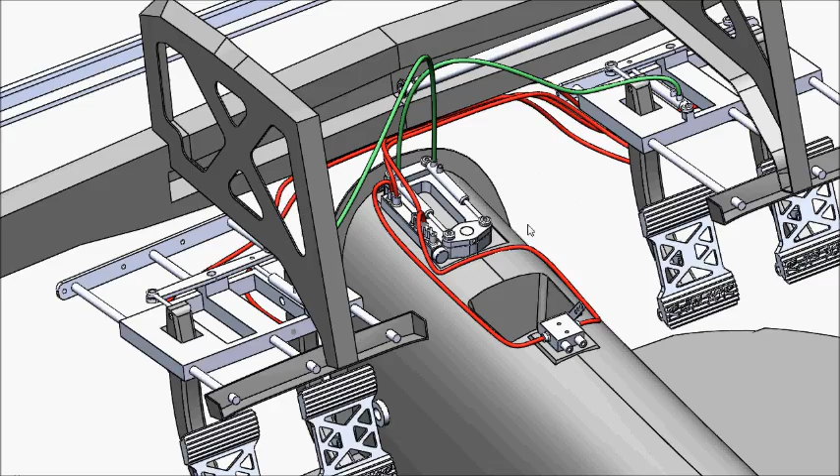So with the Raptor, what I've actually designed in here is the rudder pedals are adjustable, and as you can see here, there's this brace that comes from the firewall here and comes down to and meets with under the dash, and I've obviously got the dash hidden right now, but you can see here there's 3 rods that this fixture mounts on here, and it slides back and forwards, and obviously that's how you adjust the position of the rudder pedals.

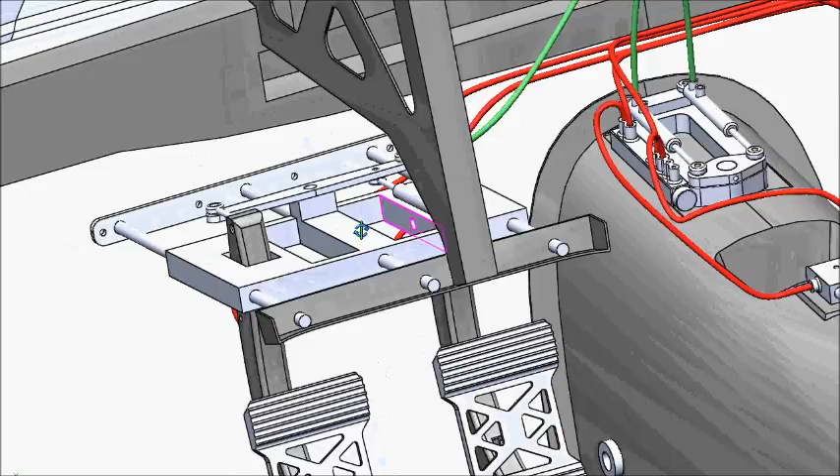And there's a 10-inch movement there, so with a combination of being able to move the seats back and forth and moving the rudder pedals back and forth, whether you're 5 foot tall or you're 6 foot or 6'7" or 7 foot tall, you're going to be able to make it comfortable for you, not feel like you're trying to reach or you're squashed or whatever. So it's really going to be a good setup.

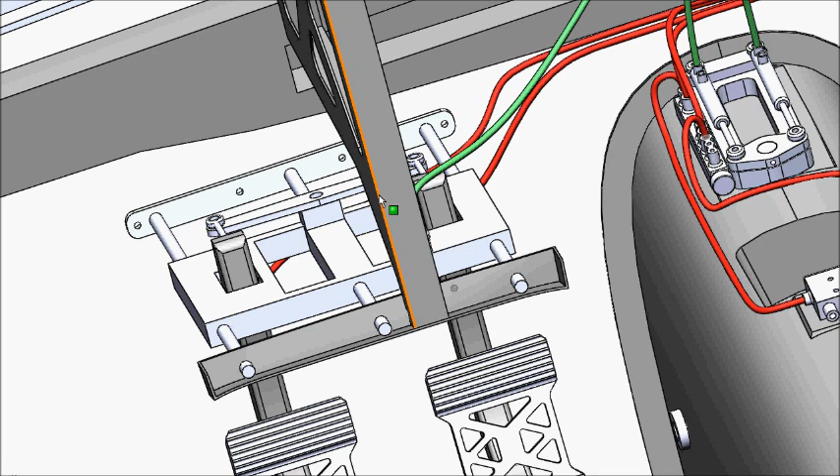And of course, the biggest problem when you design adjustable rudder pedals is how do you hook them up, because they're going to have to move, and you don't want to have a mechanical linkage because that creates a problem, because the geometry changes, and also with cables, the same type of thing. The cables will change, and so you end up having not a very good system. So I decided that if the brakes are hydraulic, then why shouldn't the steering be hydraulic as well?

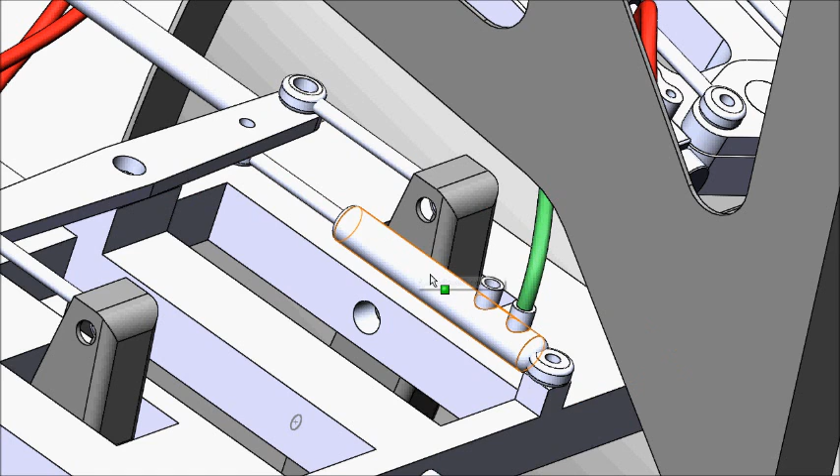So if you actually look here, I'll explain how it works. So I'm just on one of the pedals, on the left side here. So when you push on the rudder pedals here, it moves this arm back and forwards, and that moves this piston in and out. Okay, and it's just a very simple system here. So when that piston moves in, let's just say you push on the right rudder pedal there, that pulls this forward here, this arm rotates clockwise, it pushes this piston in, and then the hydraulic fluid in that line

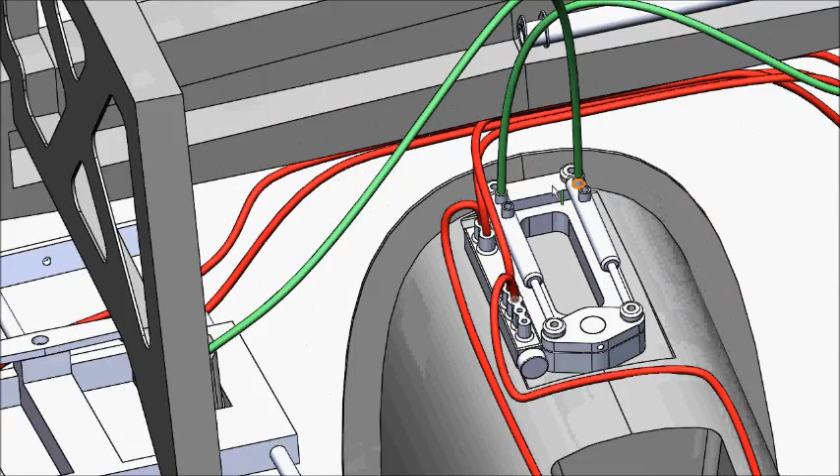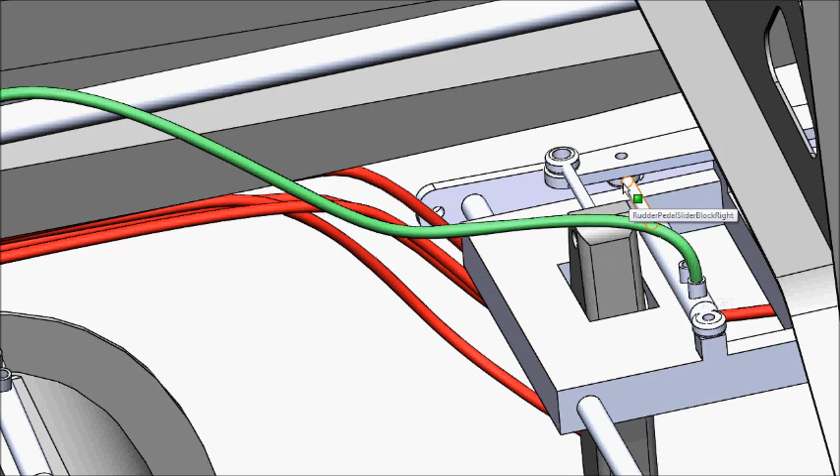comes over here and pushes this corresponding piston out, and that in turn rotates this mechanism here, and you'll see in a minute that's connected underneath to the nose wheel steering, and at the same time pushing that piston out moves this other one in, which forces all the fluid out of that, and it goes down this line over to the left pedals and will actually push this one out, which has the effect of basically moving the rudder pedals in conjunction with the other side.

So they both work independently, but the beauty of the system is that you can slide your rudder pedals back and forward, adjust them independently of each other, and not have to worry about any geometry changing that affects how they work. It's purely a hydraulic system, so it's really neat and tidy.

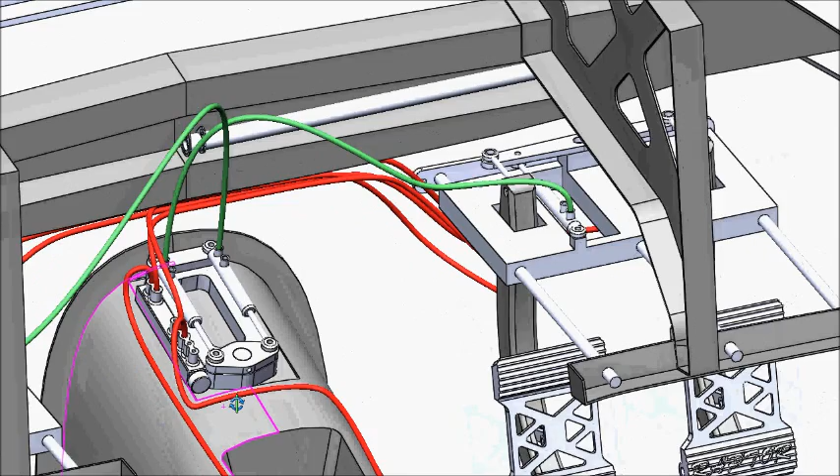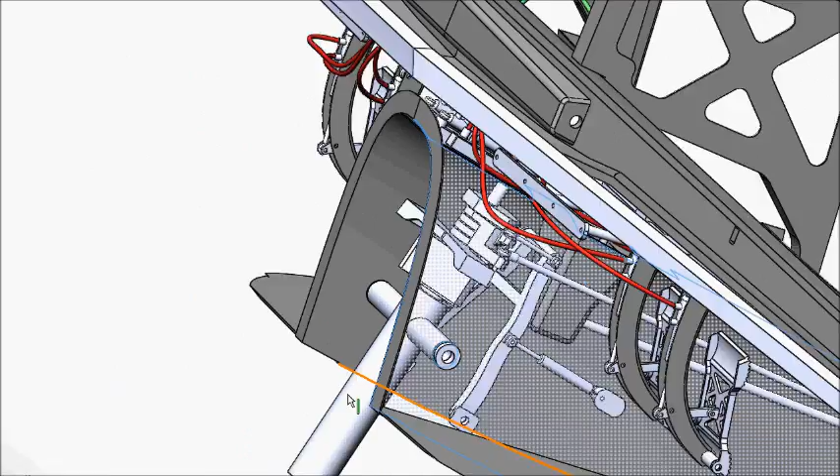And underneath here, I'll actually just change the visibility on this, or the transparency. So as you can see, underneath there is the nose gear. So this particular rod here will pivot, and that's basically attached down there to the nose wheel. It goes through this main rod, which doesn't, but then it's fully attached to this one here, so that whole thing will pivot. And how that all works, when the landing gear actually goes down, it meets up with this sort of thing here.

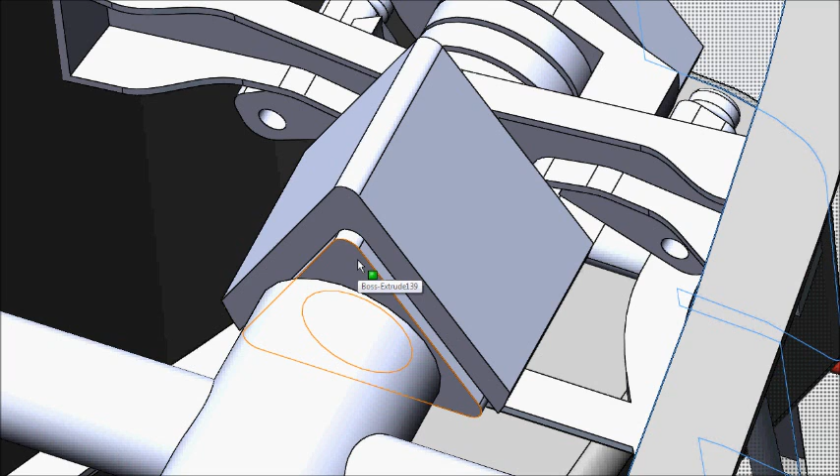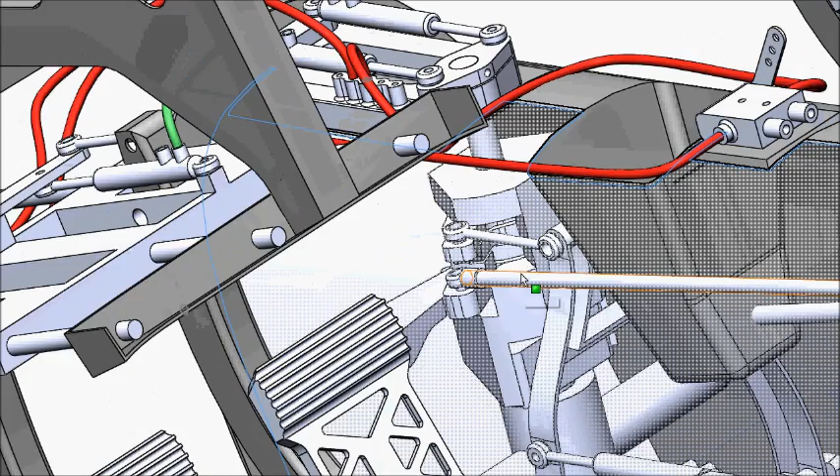So I can't really retract the gear right now, but as you can see, this gear will rotate around this point here, and these 2 little V things will disengage when you put the gear up, and when the gear comes down they re-engage, and that attaches the steering system there. And there's a lot going on in here that I'll talk about in a minute, but as you can see, that's how the rudder system works right now, and that's for the nose wheel steering. And I'll show you again in a minute, but the rudder is actually hooked up to that as well. Well, actually, let me just talk about it right now.

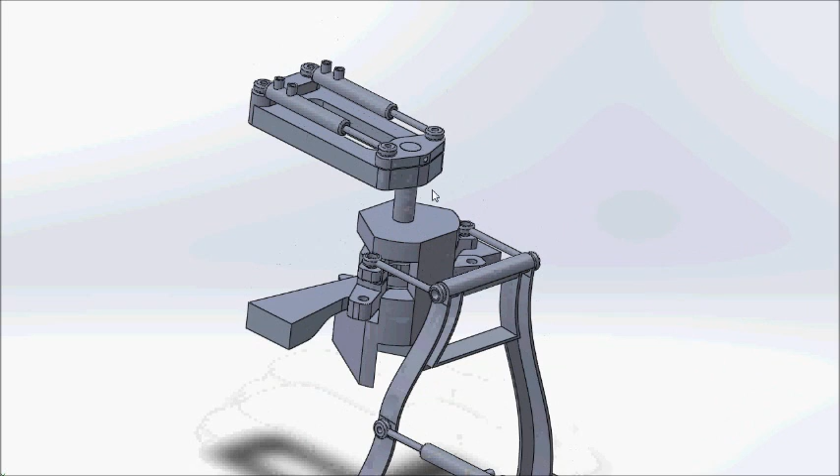So here's this crazy looking contraption that looks something like out of Star Wars, but let me explain how it all works. So let's just take the example of you're pushing on your left rudder and wanting to turn left. Actually no, let's just do right rudder and wanting to turn right. Okay, so when you push on the right rudder, you need the nose wheel to turn to the right.

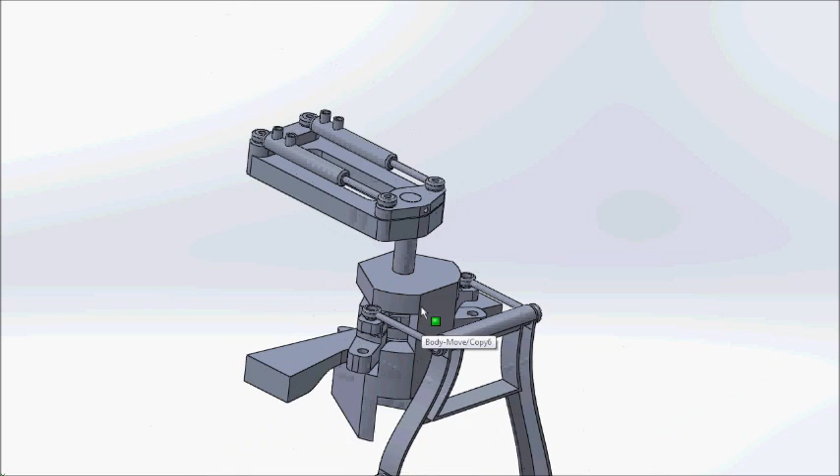Okay, so what ends up happening here is when you push on the right rudder, this piston here gets extended, which rotates this in a clockwise motion, which again is attached to this rod here, and that rotates in a clockwise motion. And then this next piece or fixture or whatever you want to call it, that rotates as well in a clockwise motion,

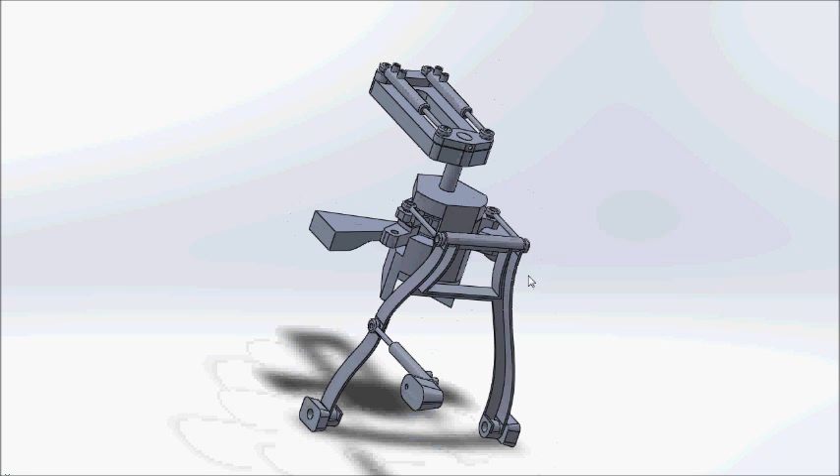and that is attached to the nose gear via the V here, the mating V between it and the nose gear main shaft. And so that whole fixture turns to the right up to 40 degrees, and that's how you turn the aircraft when you're on the ground.

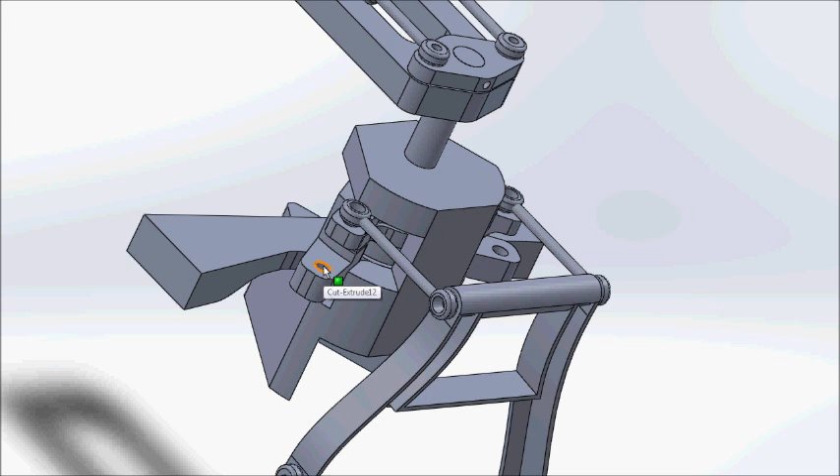Okay, so now how does it work with the rudders? The way that it's being designed here is that this connector point here on the left side actually hooks up to the right rudder, so they're sort of crossed as they go back through, down through the keel and up back over the main tank in the back there, and then of course they switch over onto the opposite wing.

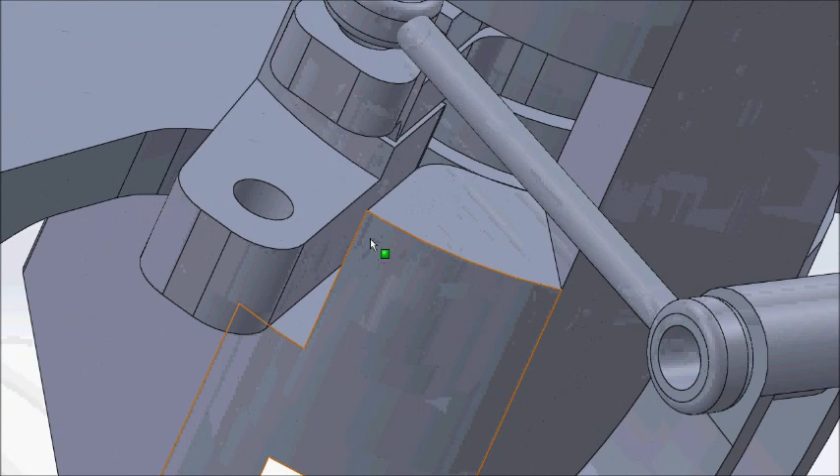So what ends up happening is here, when you push on the right rudder, this rotates clockwise, that rotates clockwise, and as you can see down here, this point here is already pushed hard up against this thing here, and so when you push right, this thing will rotate right.

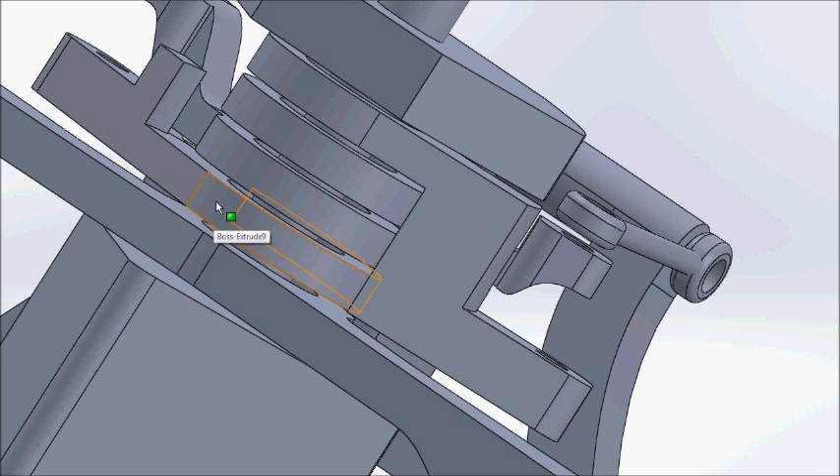And as you can see here, there's 4 different things here. The top one here is for the right rudder, even though it's on the left side of the aircraft, and then this bottom one here is for the left rudder, even though it's on the right side of the aircraft, and these other 2 I'll explain in a minute, but those are for the drag brake actuator. And all 4 of these will be riding on a regular sealed bearing there, so they could rotate freely around that center shaft there.

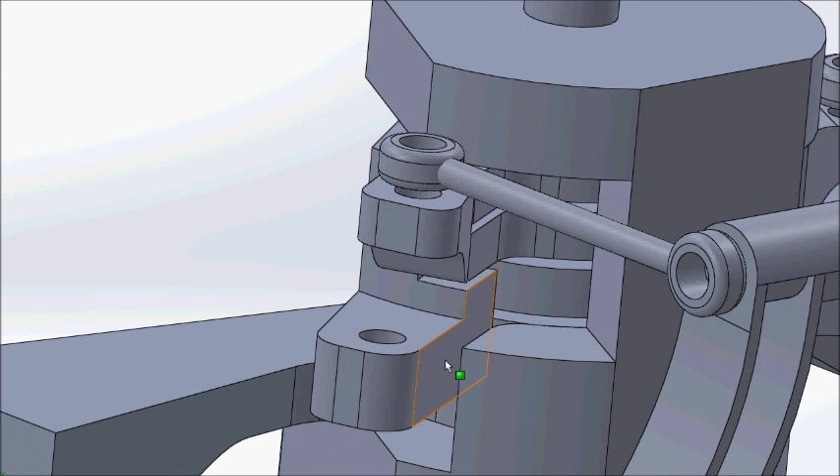So you've pushed on the right rudder, you're rotating this thing clockwise, and that in turn is pushing here, this interface between these 2 pieces, and it will move this thing through an arc of 40 degrees, and the actual movement here is a 2-inch movement from here to where it ends up over here, and the rudder connector rod is connected to that.

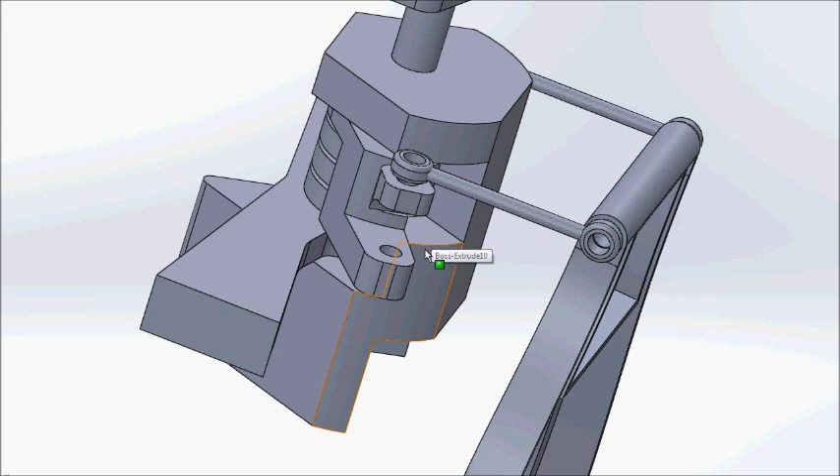So by pushing on that, you're pulling on the rudder connector rod, and then that goes back all the way out, down through the wing spar and right to where it turns that right rudder and deflects it to 40 degrees. So actually the rudders deflect 40 degrees, and so does the steering. So it should actually have really good rudder authority, being able to push it 40 degrees. So that's kind of how that works. And when of course you relax your pedals back to center again, that will just come back.

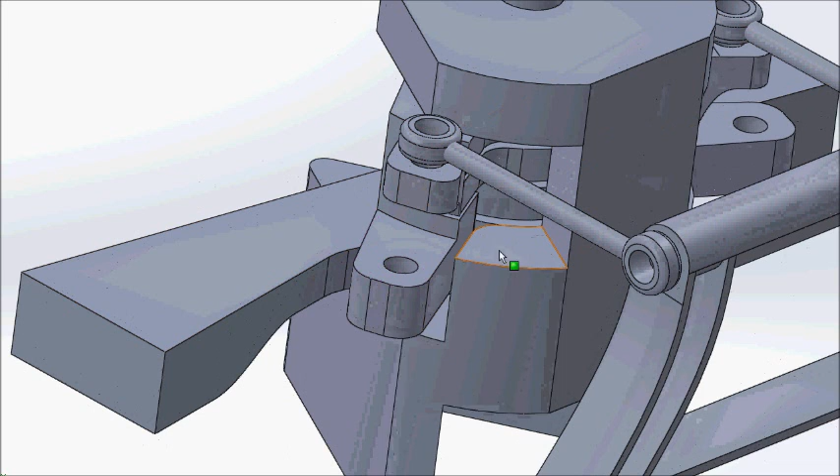Now that whole time when you were pushing on the right rudder, nothing was happening on this other arm over here, because that can't go back any further than that, because that's the stop point for the rudders. In fact, there'll be springs holding these, so they will always return back to this center position here, or the non-deflected position if you're not using them. And that whole time this fixture here had rotated away from this thing here, so it didn't have any interaction on it, so that rudder didn't get actuated.

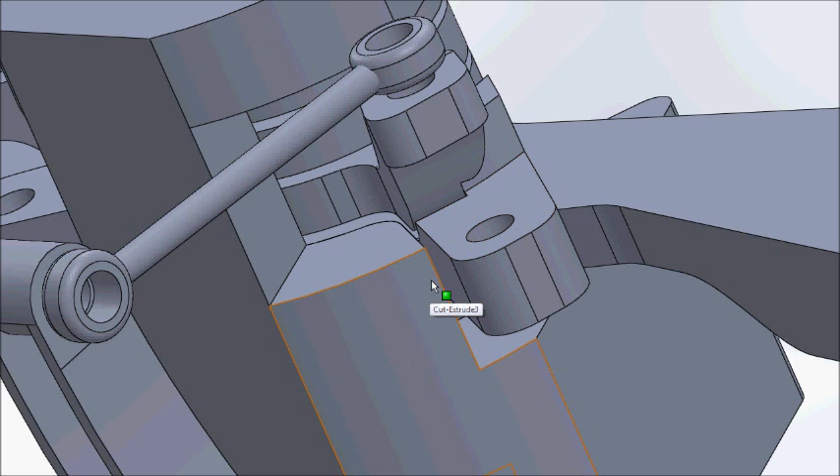And of course if you push on the left rudder, this thing rotates anti-clockwise, and then that thing will get pushed that way, which will pull on the left rudder arm actuator, which will engage the left rudder. So they work kind of independently, but they're sort of hooked up to the steering mechanism.

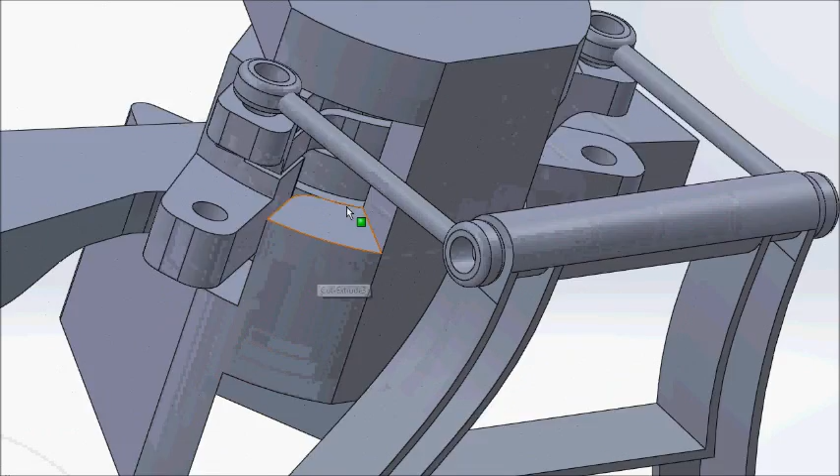And the reason why I've got this other thing here, this is for the speed brake, because I wanted to be able to also have a speed brake for the system that was operated by a push button on your side stick.

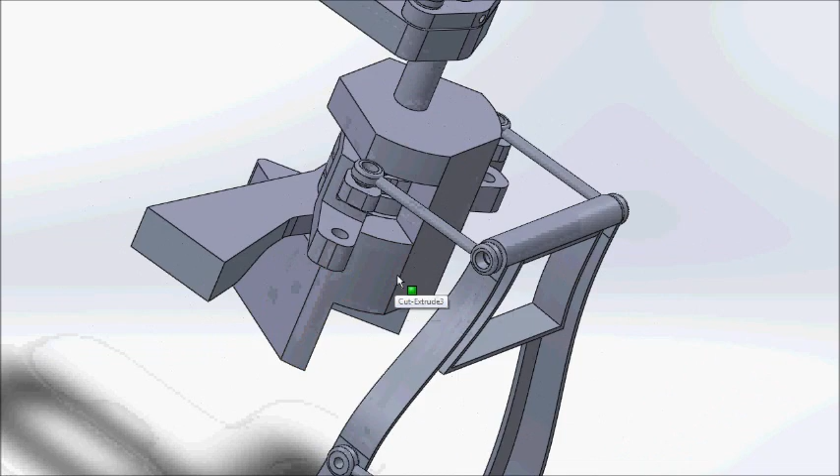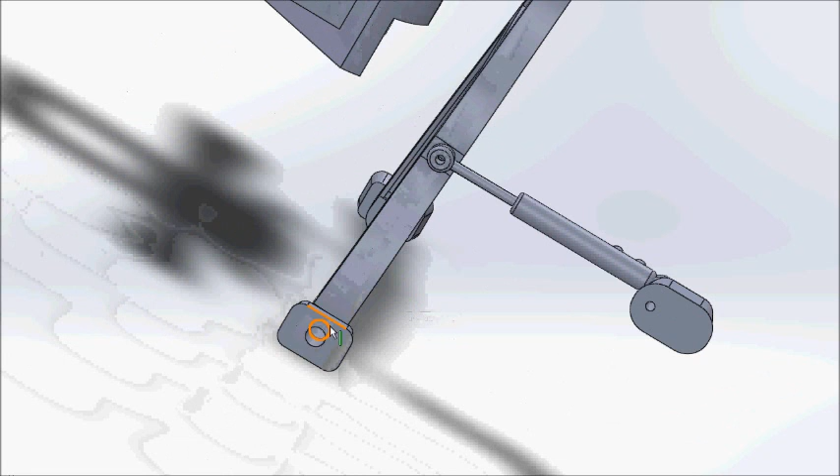So there'll be a single momentary button on the side stick, you have to hold it in to keep it actuated, and that will operate an electric motor which will hydraulically push this cylinder out here. This particular arm down here pivots around this point, and it's fixed in under the keel there, so when that arm goes out, it pushes this whole arm fixture here, and it rotates around that bottom point. This point here will move to about here, and in doing that it will push this arm here and the corresponding one on the other side.

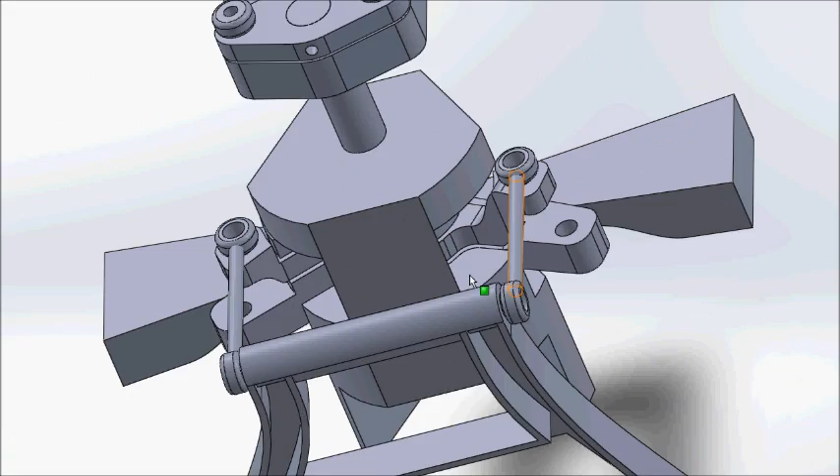They'll both get pushed forward, and as you can see, if you look down through here, that's part of this arm here, and when it pushes forward, it can't do anything but push the rudder arm forward as well. And again, it's independent of where the steering position is. If the steering's in the center, this will just push forward, and both rudder arms will come forward because they're pushed up against there.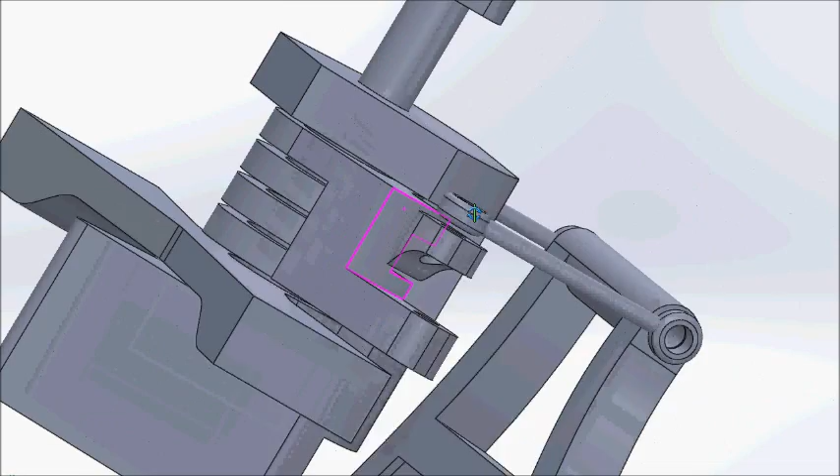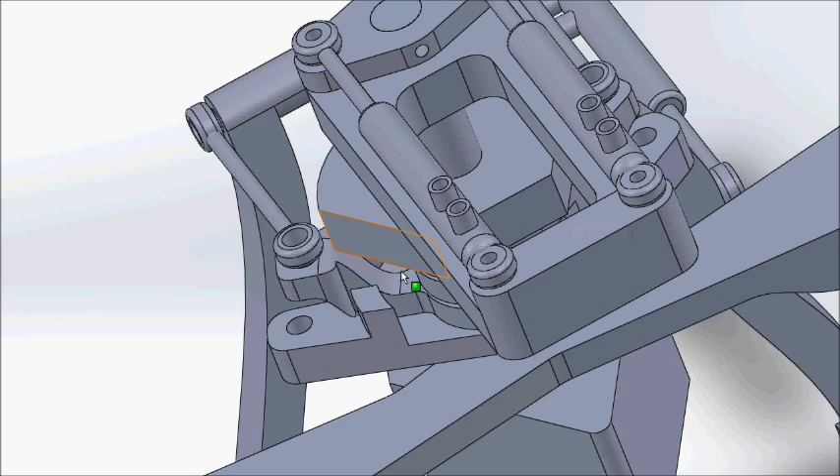You can see how that one interacts with the other, and it's the same on the other side. This one's more obvious because you've got a pillar there that's resting against that, so one just pushes the other. So you'll be able to push that button and both rudders will be actuated, and when you let go, because it's spring loaded, the rudders will come back in. So that's kind of a nice system.

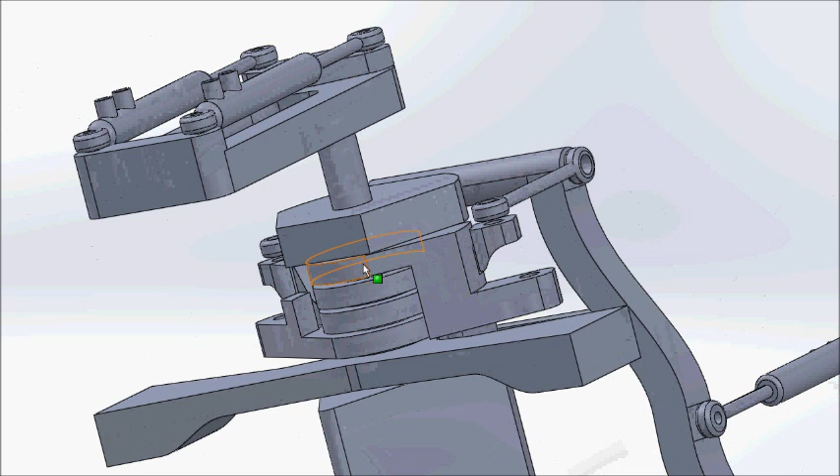It looks a little bit complicated, but if you think about it, it's actually very simple, with very little that can go wrong and very little that can wear out. So that explains how that whole system works. And like I said, there will be 4 different sealed bearings in there, so they can rotate independently. And then this arm here is a brace that braces from one side of the inside of the keel to the other.

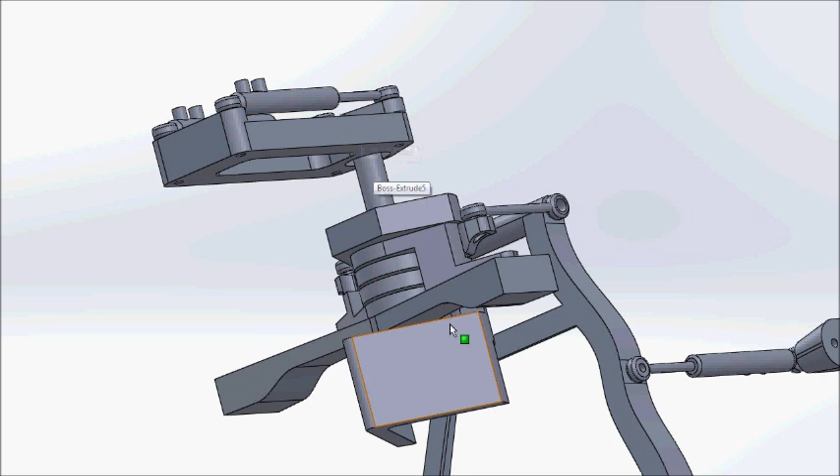So you've got a point up here where this bolts to the top of the keel to hold the shaft, so it's not going to move around. And then this brace here is on the side of the keel to hold the whole mechanism so it won't move around. And then this will all be CNC machined out of billet aluminum, so it should be fairly lightweight but still strong enough to do what we want it to do.

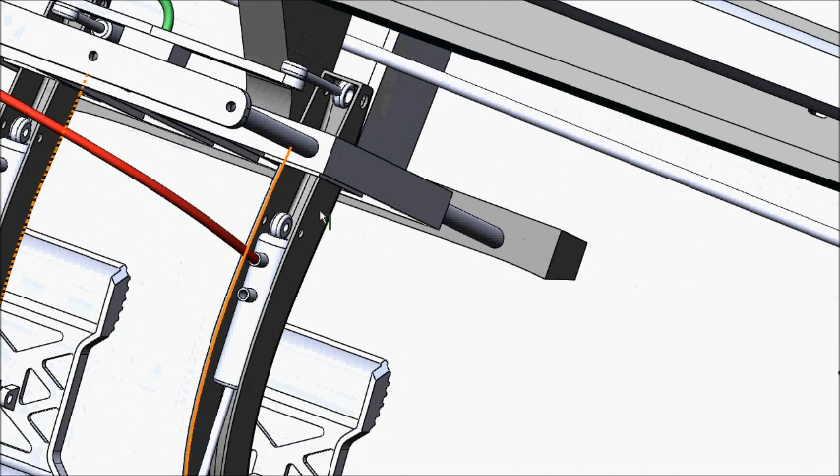Then the braking system: if I go into that, you'll see behind each of these rudder pedal arms you have the brake master cylinder, and the ones on the left side are connected over to the ones on the right side, and then they connect back. We're going to be using the Beringer system, and once they connect back from the passenger side, they connect into their anti-lock braking system, which provides a regulated amount of pressure so you don't lock the brakes up.

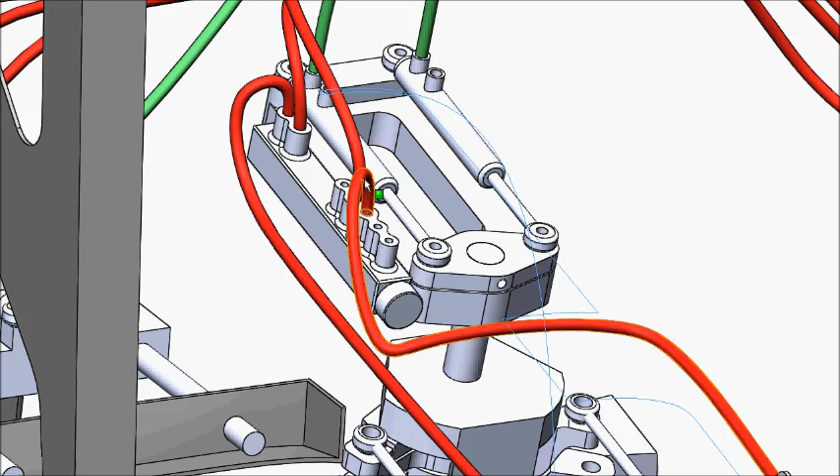And then the system from there comes out here and goes into this little control, and that's for your park brake. There'll be a lever here that hooks up to your park brake system for when you want to lock the brakes. And then out of these 2 things here will go to your left main brake and your right main brake. So that's the braking system all sorted out, nice and neat and tidy, and again anti-lock, which is kind of nice.

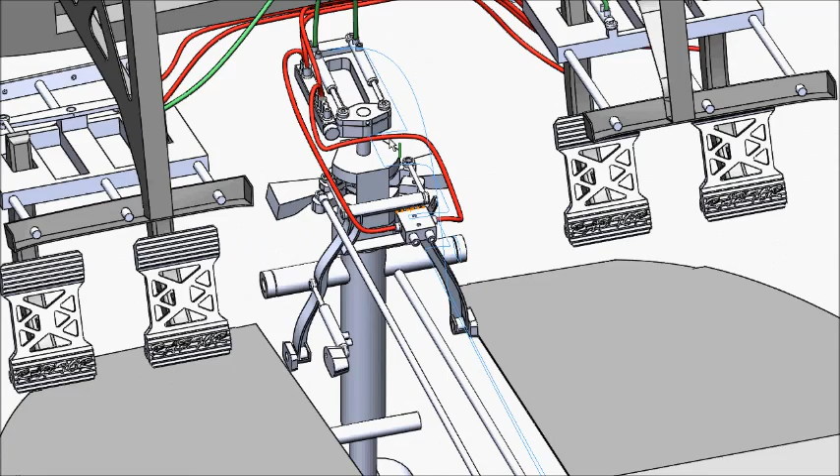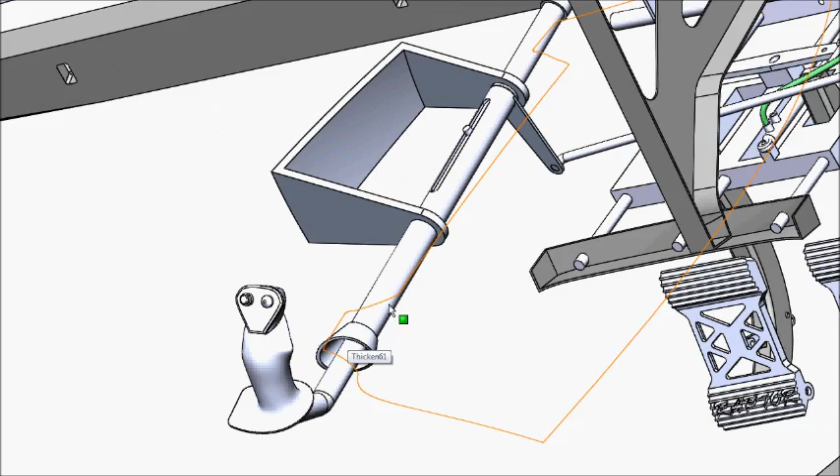Okay, so let me talk now about the flight controls, and I'll start with the aileron control. I've got the dash hidden here, but as you've seen in previous pictures, the control stick, and this is the one on the left side, comes out the bottom left hand corner of the dash. For working the ailerons, it's just going to be rotating it to the left and the right, and right now it's configured for an 80-degree total throw, so 40 degrees to the left and 40 degrees to the right.

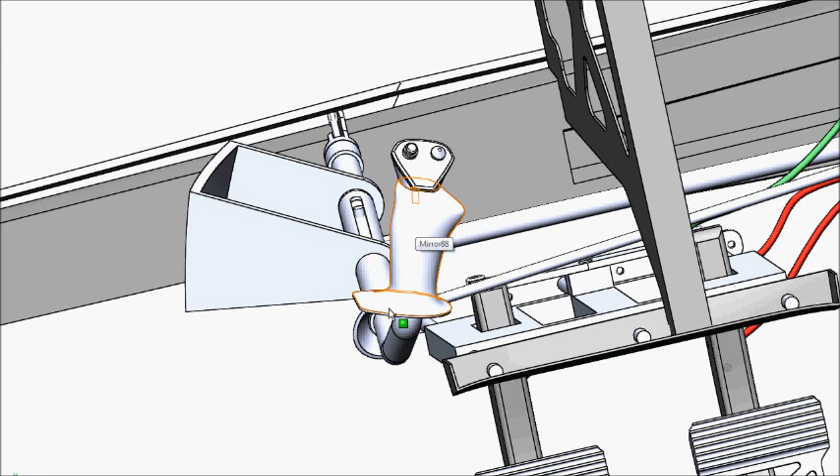And as you can see there, the center position is on an angle, so it's not straight up and down, because you'd be hitting the inside of the door trim if it was. So this will move from this position over to about here, and that will be full left aileron, and then it'll move down to close to horizontal for full right aileron.

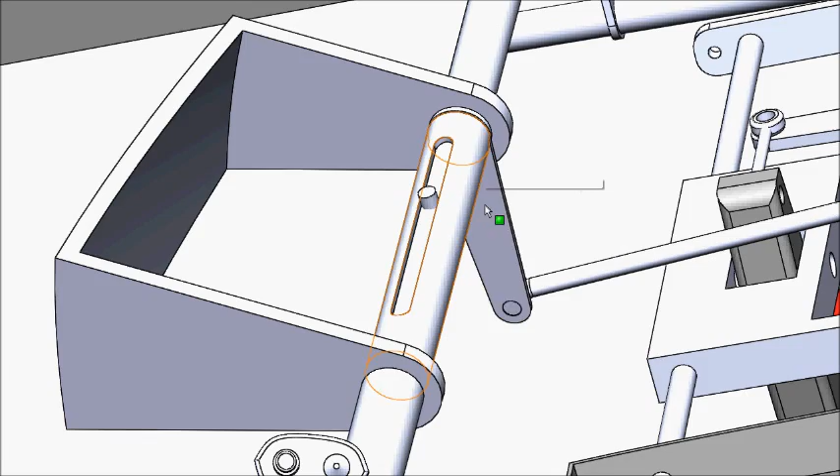And what that actually does behind the dash here is it moves this particular fixture here, which in turn is completely adjoined to this arm here, and that moves this rod, and then you have this larger rod here which goes down into this thing.

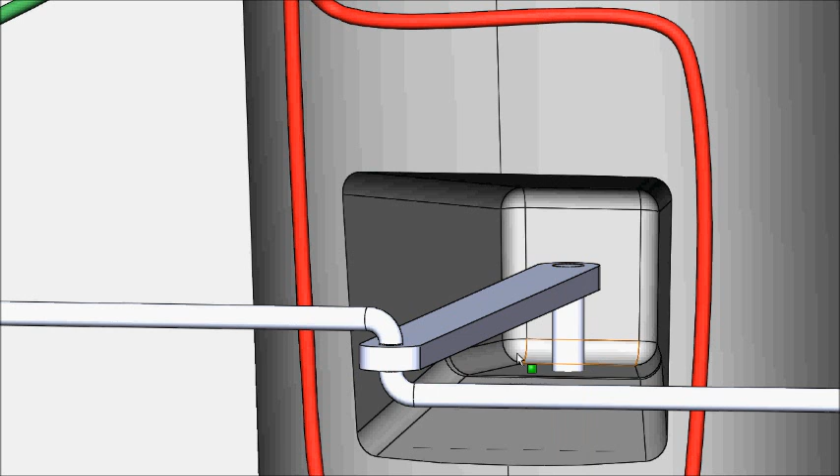And the reason why this is down in here like this is because there's going to be a bearing in here which is going to be sealed for the pressurization, and this is the cleanest way to ensure pressurization of the cabin without having to do a bellows system or cables or anything like that. So it's a nice, neat way of making sure that the cabin stays pressurized and still having all the geometry of the controls work correctly.

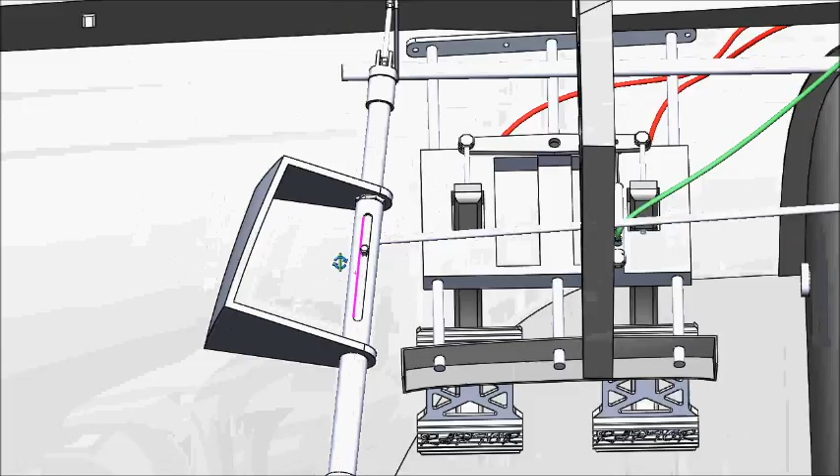So as you can see here, let's say if you move the control stick to the left here, that's going to rotate it this way, anti-clockwise, which will in turn move this arm closer to the center of the aircraft here, which will move this arm across here and then back down here.

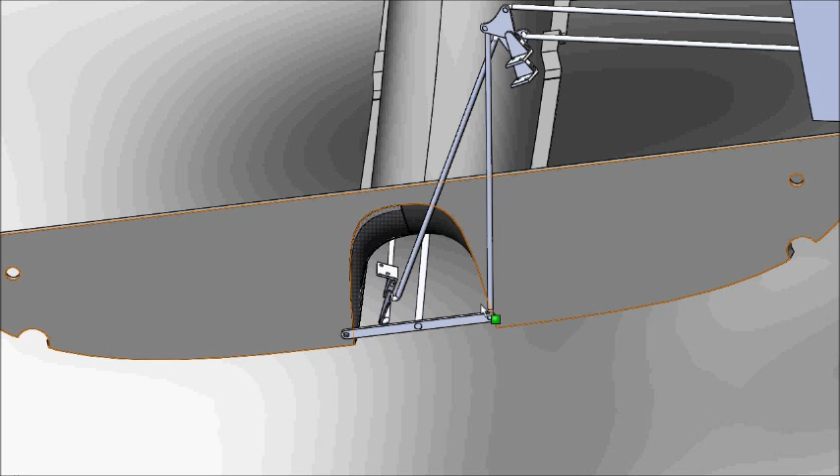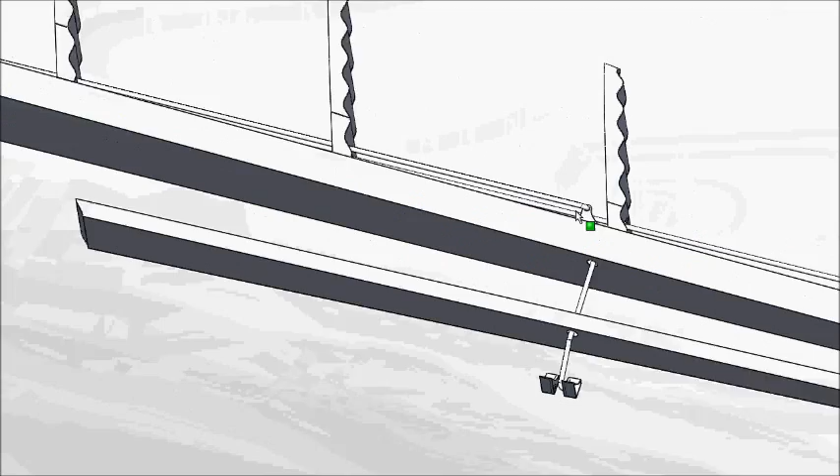That arm ends up being connected to here, and because it's moving across this way to the right, this thing here will rotate clockwise, pull this arm down, which ends up pulling this arm here back for the ailerons, and we go all the way out here, it's pulling this one back here. I'll rotate around so you can kind of see what's going on here.

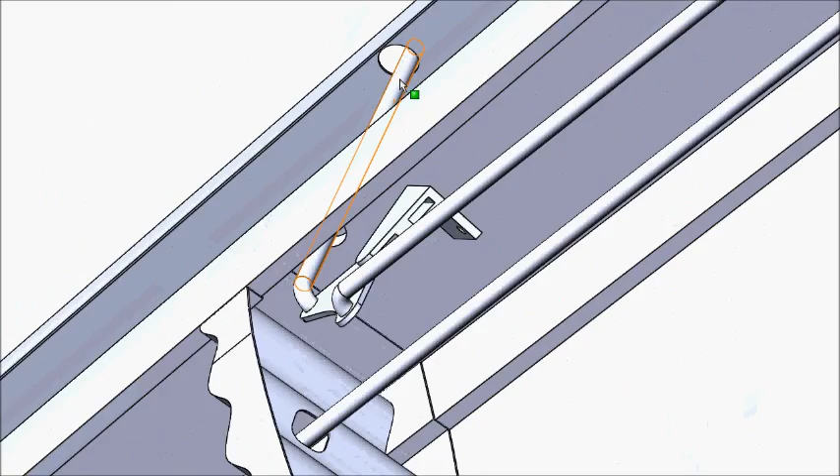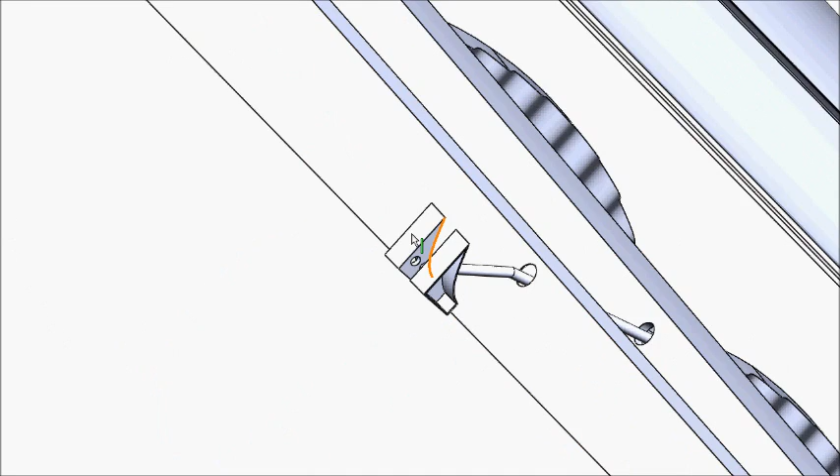So that pulls this back here, which in turn pulls this arm back here, which in this part here you obviously can't see, but that is inside the aileron, and that will pull on the aileron and it'll rotate around the hinge, which is here, and so it has the effect of putting the aileron down, and that's how you make your left-hand turn. Because that aileron will come down, the wing will go up here, and you'll make your left-hand turn. So that's kind of how that works there.

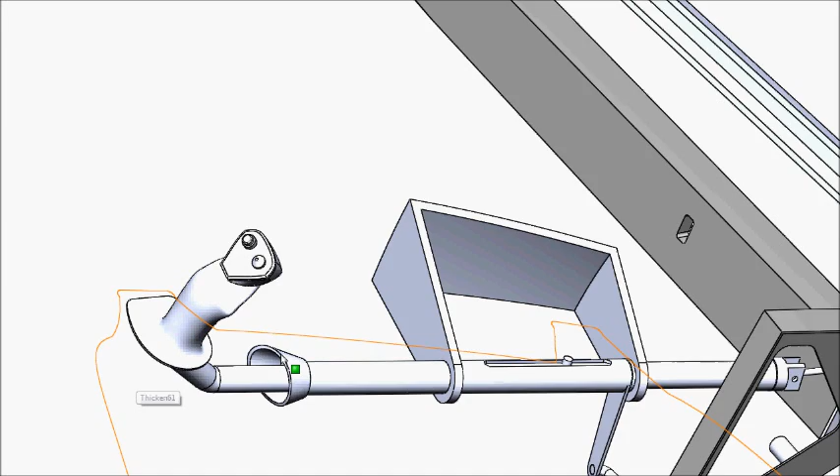And let me now explain how the elevator part works. So the elevator, obviously you're pulling on your stick, moving it in and out, and by default you have 15 degrees pitch down. In other words, the elevator can come up 15 degrees and it can go down 30 degrees, so you have more authority when you're putting it down to get your nose to come up, because you don't really need a lot of nose down authority on the elevator. So like I said, 15 degrees the elevator comes up, and 30 degrees it goes down.

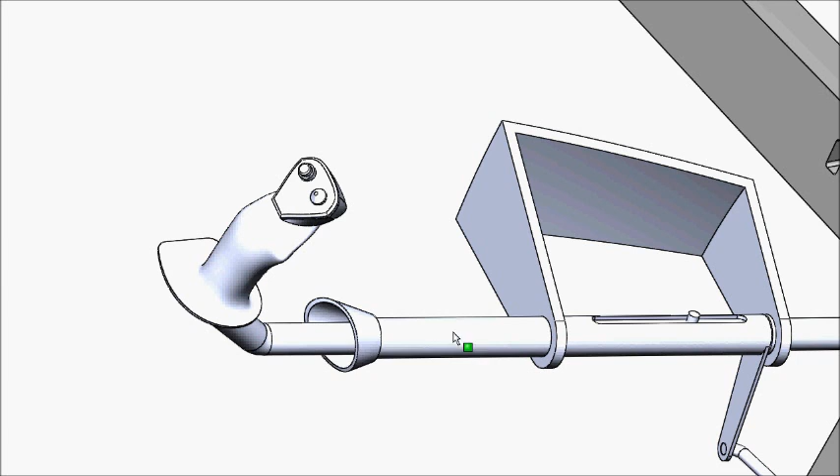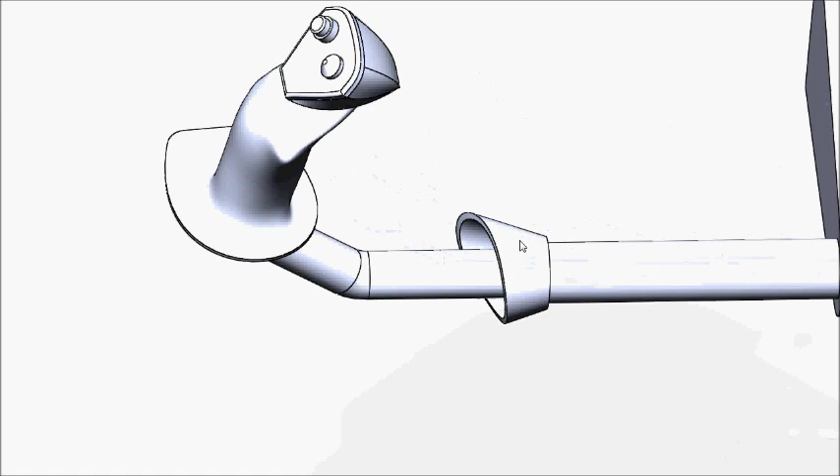So how that translates to the actual control stick here, this is the center position here, you'll be able to push it in about 1.7 inches, and it'll come out about 3.4 inches, so the total travel is about 5 inches. So it's a little bit less than probably what you're used to in some other aircraft, but in terms of being comfortable, unlike maybe a Cessna 182 where it can really come out a long way, you don't have to move it quite so far.

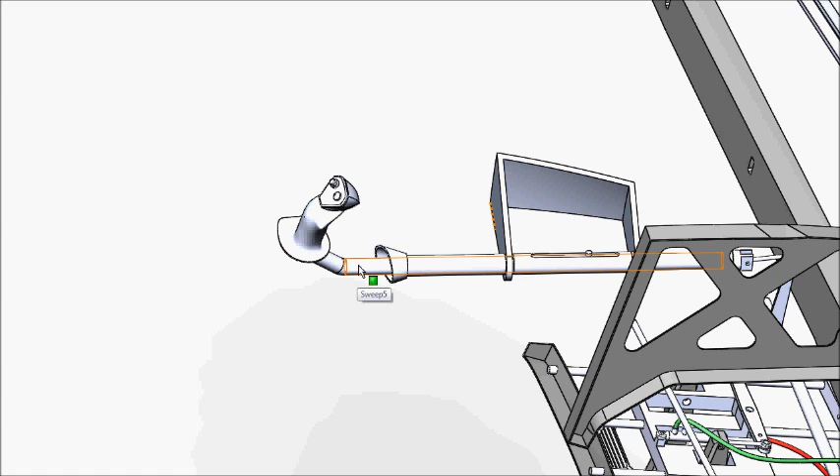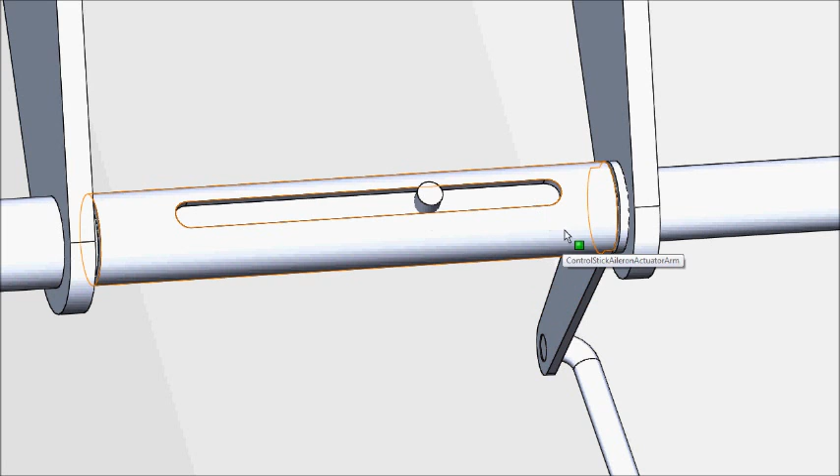So the controls should be light because of the horns that we have on the elevator to ease the control pressures. So it should be kind of nice, but still not feeling overly sensitive. So when you move the control stick out and back in again, this little pin here is basically locked into that center thing, so it can slide back and forwards and not interfere. But that pin there is really to make sure that the ailerons work, so it slides back and forwards, so when you rotate it left and right for your aileron control, this actually moves.

But this whole arm in here moves in here, and this is fully attached right to the stick all the way back to there. So when you pull back on that, it pulls back on this arm, and let me see if I can get a good angle on it here for you. Let's go back here.

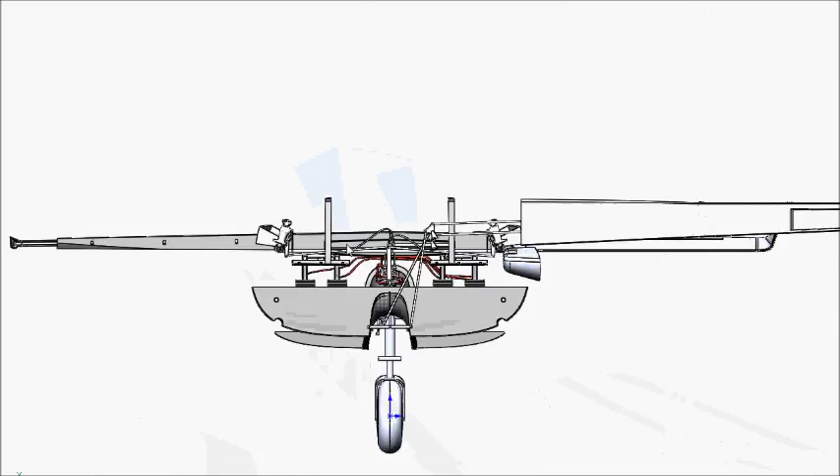Okay, so it pulls back on this arm, which rotates this rod, and you'll see that this rod is interconnected with a sort of a duplicate rod. In fact, I just haven't extended it here, but they're both the same length. Well, they're both full length. And again, we're still inside the cabin, the pressurized cabin here, where these rods are connected.

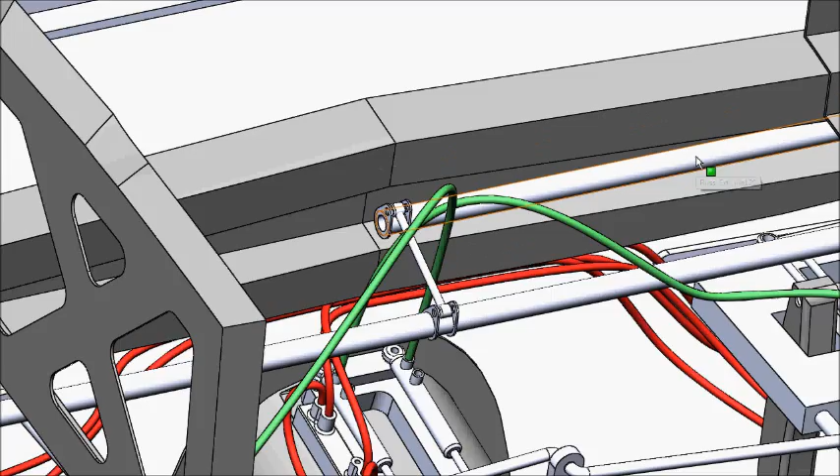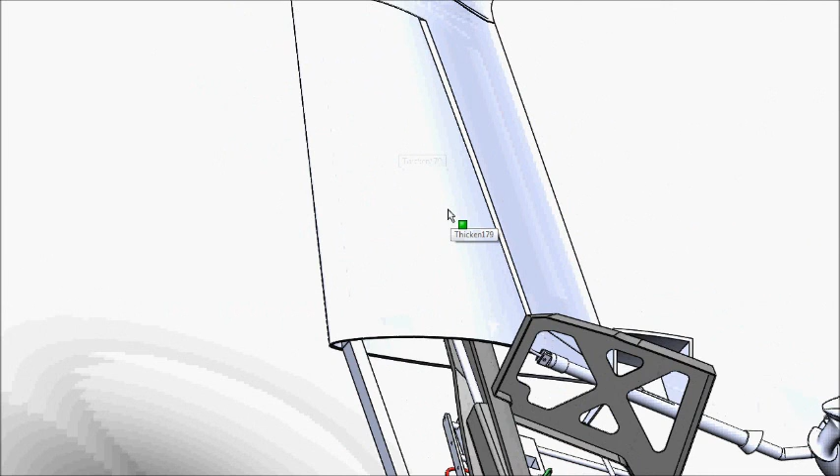As you can see, the second rod gets rotated when you pull back, and here's where it goes through the firewall, or actually I should say the forward bulkhead, kind of like a pressure wall. There'll be a bearing around here again which seals that, so you don't lose any pressure through there. And once it goes through there, you can see it's basically going up into the foreplane there, and I'll just hide this here so you can see what's going on.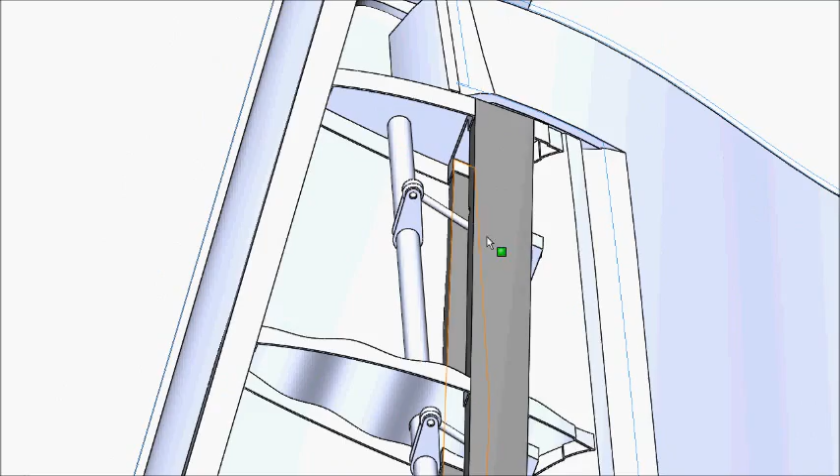So again, that's rotating, and so you see there's 3 different arms here. I'll just pick this one. So again, when you pull back on that, it's pulling that arm back, which in turn ends up pulling this arm back, and you see that there's a rod here which goes through the back side of the main part of the foreplane, and I'll just hide the top of the elevator here.

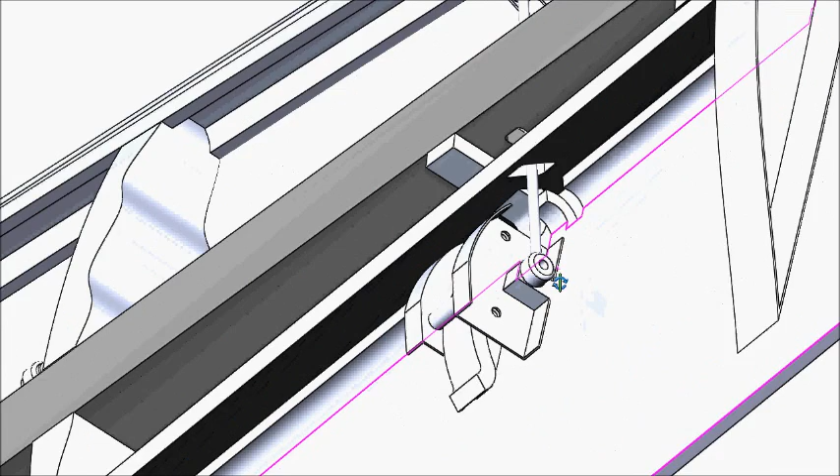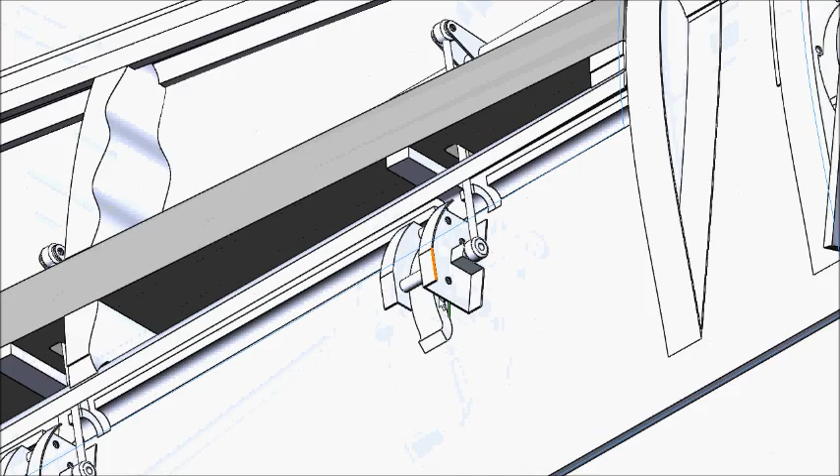And you see this is where it connects to the actual elevator itself, and when you're pulling back on that, it's moving this whole arm backwards this way, and basically pushing on the elevator to move it back this way. And you see in those previous images I had on the website with this roller hinge system, the whole elevator system will roll back on these hinges, and because these arms are curved, it will rotate the elevator to give you the effect of a 30 degrees pitch down.

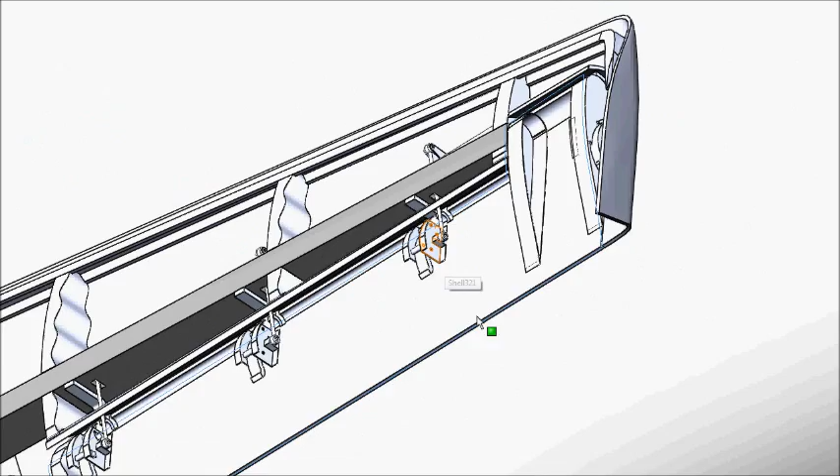And likewise, when you push forward on the stick, all this thing rotates forward, and the elevator comes up 15 degrees. And there's 3 of these control rods that hook up here to make sure that the whole system rotates in conjunction. It doesn't sort of get pulled or get locked sideways or whatever. It's going to be a nice smooth mechanism, so you don't have to worry about it getting crossed up or anything like that. And those arms, you'll see that they basically just attach to the back of the spar, and that's what the whole elevator is pivoting on.

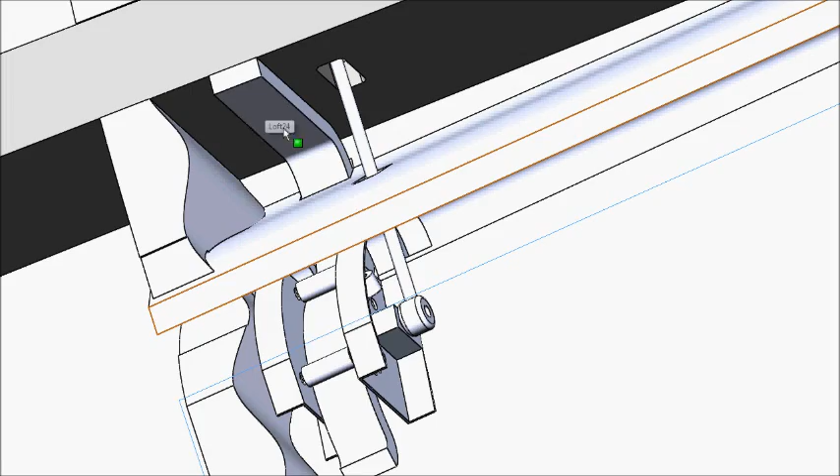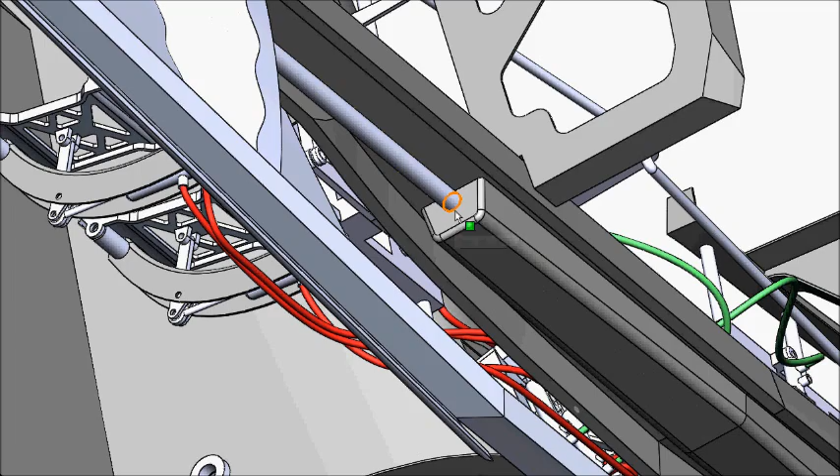So, like I said, that part there where it goes through the forward bulkhead, if you look on the outside, there is where it's going through. Obviously I've got the bulkhead hidden right now, but we're just looking at the spar. But that's where it crosses through. So again, that's a place where the pressurization needs to be maintained. And again, there'll be a seal bearing on the inside there with a pressure system, so it won't allow the pressure to escape.

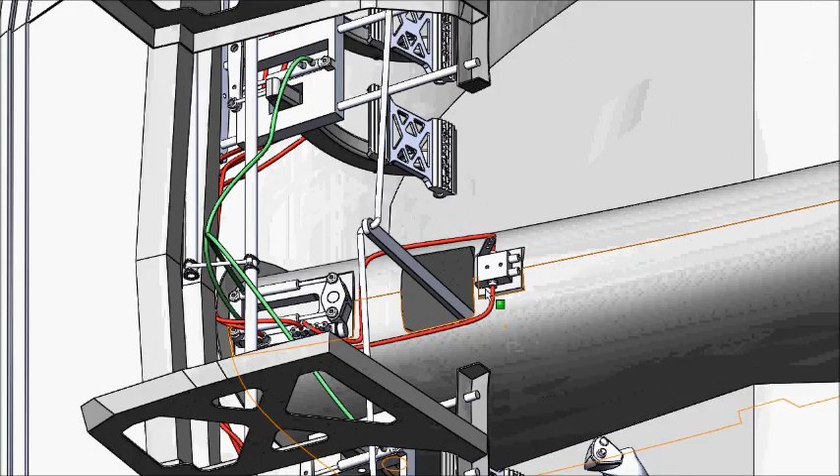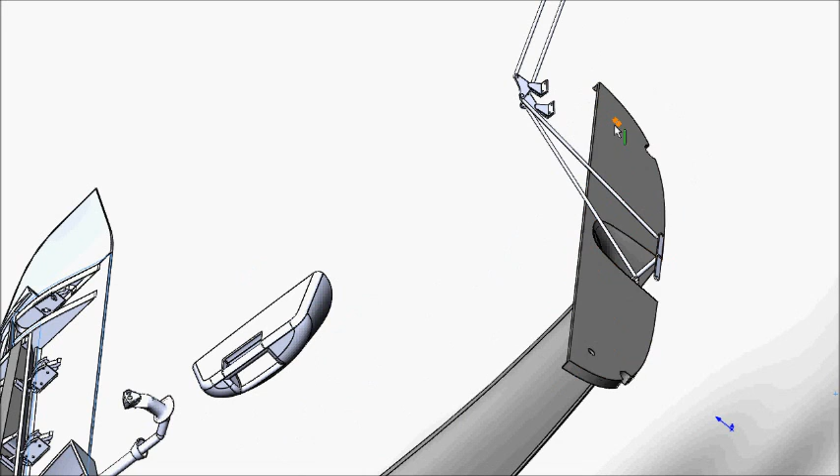So there's no bellows system in here like you have to have on most things. It's all going to be done with seal bearings where the controls cross over the pressure wall. And for the throttle controls, which I haven't done yet, those will just be using cables. There'll be a mount here that corresponds to where the center console is, and those cables will come back down up under here, go back over the main tank that's behind the seats, and go right through the firewall, and those will be sealed, and you don't have to worry so much about the cables leaking because they're kind of sealed cable anyway.

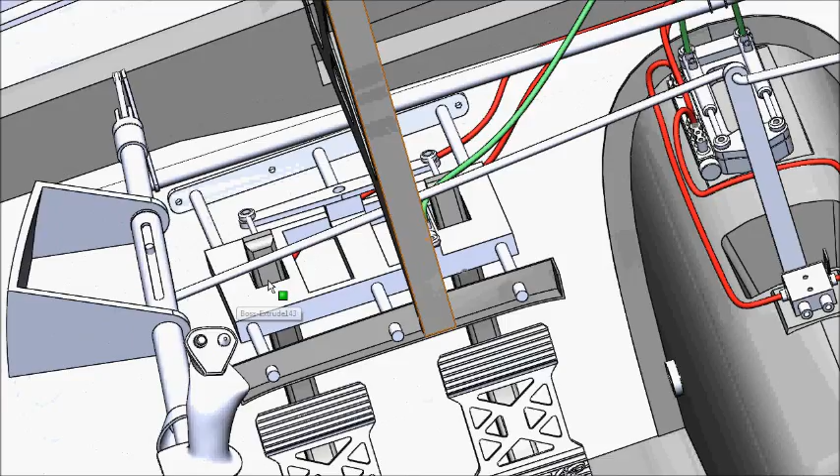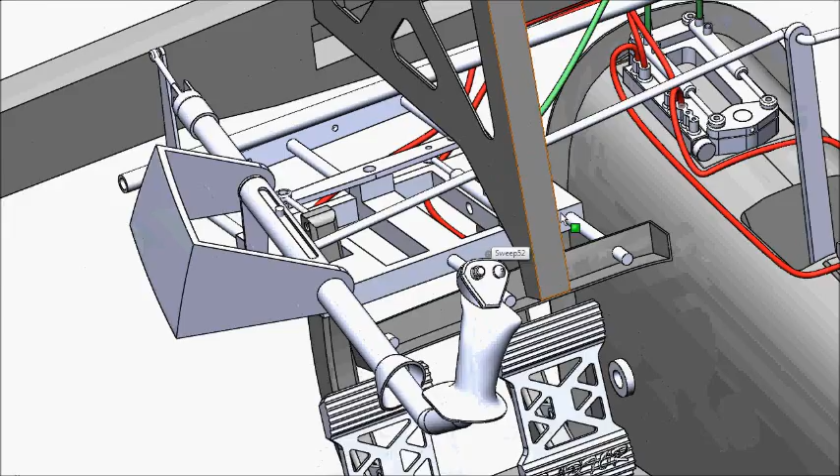So that's kind of how the elevator and the aileron works, and I've explained how the steering works with the way it's hydraulically set up. And again, this rudder pedal system here on that little slider will be electrically controlled, just like your sliding seats in your car. Just a little motor with a gear drive to move that back and forth to get them right where you want them. So you'll have kind of an infinite adjustment there. It won't be like clicking into place. You'll be able to get it exactly how you want it, just with a little electric switch. So it'll be kind of nice.

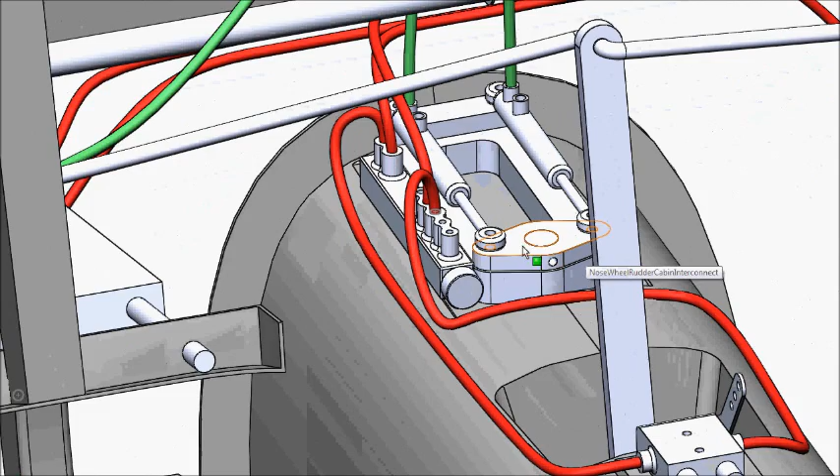So it pretty much covers everything with respect to the ailerons, the elevator, the rudder for steering, the brakes, and the anti-lock braking system, and the steering system that I talked about, and also the drag brake system. Again, that's just going to be a button here on your control stick to activate the drag brakes. So I think that covers everything that I wanted to talk about in this video, and maybe I'll do another one for the next feature that I'm doing.